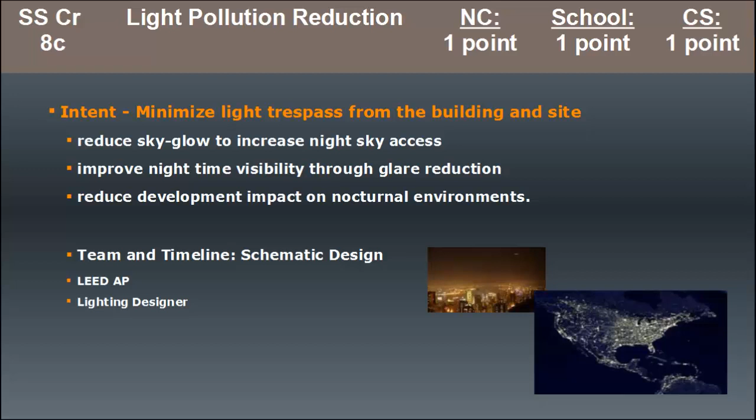Project teams must comply with one of two interior lighting requirements. Option 1 is reduce the input power by automatic device of all non-emergency interior luminaires with a direct line of sight to any openings in the envelope by at least 50% between 11 p.m. and 5 a.m. After hours override may be provided by a manual or occupant sensing device, provided the override lasts no more than 30 minutes.

LEED version 4 draft 4 proposes to remove the interior section of this credit since it is covered in the energy and atmosphere section.

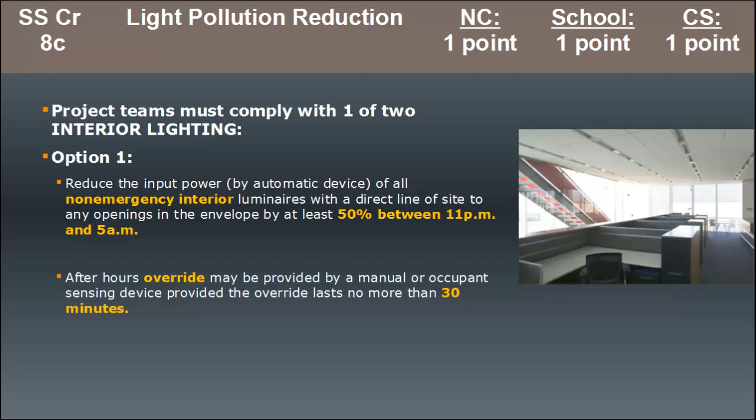Option 2, all openings in the envelope with a direct line of sight to any non-emergency luminaires must have shielding, controlled closed by automatic devices, and be resultant of transmittance of less than 10% between 11 p.m. and 5 a.m. This is for interior lighting.

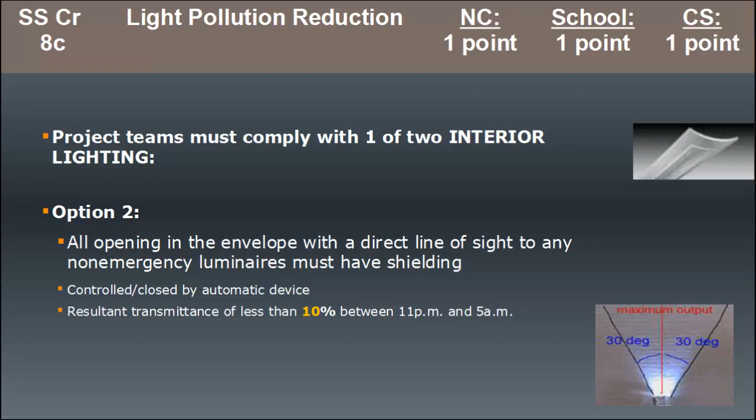For exterior lighting, the requirement is to not exceed ASHRAE IESNA standards of 90.1 2007 exterior lighting section. Must meet 80% of the lighting power density in watts per square foot for exterior areas and 50% of lighting power densities for building facades and landscape fixtures and features. So you must meet the standard for light trespass for zone requirements.

You see here there are some integrated lighting, solar powered, exterior lighting, glare control. Basically what you're looking for are full cutoff luminaires.

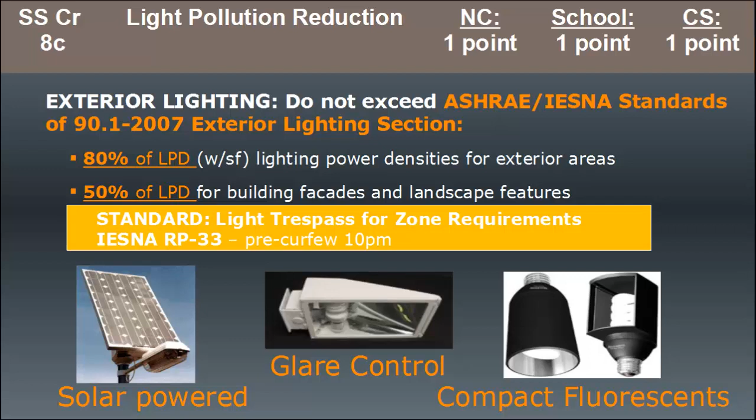The lighting zones currently include LZ1 dark, park and rural, LZ2 low residential areas, LZ3 medium commercial industrial high density residential areas, LZ4 high major city center entertainment districts. Associated with each one of those is illuminance values.

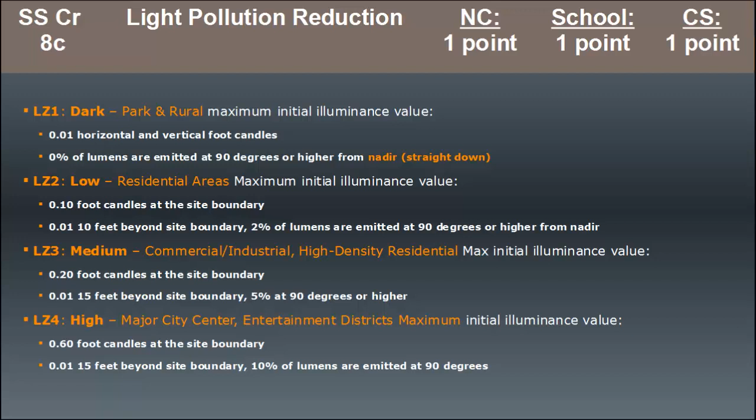For LZ1, this includes 0.01 horizontal and vertical foot candles. 0% of lumens are emitted at 90 degrees or higher from nadir, straight down. In comparison, LZ4 high, here's in the city center, the illuminance value is 0.6 foot candles at the site boundary, and 0.01, 15 feet beyond the site boundary. 10% of lumens are emitted at 90 degrees. And then LZ2 and LZ3 fall between that.

For all zones, light at the intersection of a private driveway and public roadway accessing the site is allowed to use the center line of public roadway as a site boundary for a length of 2 times the driveway width.

For schools, regarding sports fields, the sport field lighting is exempt from these ASHRAE standards. Automatic shut-off is required no later than 11 p.m. Manual override must be provided to avoid disruption of events.

For schools, trespass, there are calculations in 2 conditions. With the sports lighting turned off, the light trespass requirements are same as listed above, but with just the sport lighting turned on, the light trespass requirements for horizontal and vertical foot candles may be increased. This is only for schools.

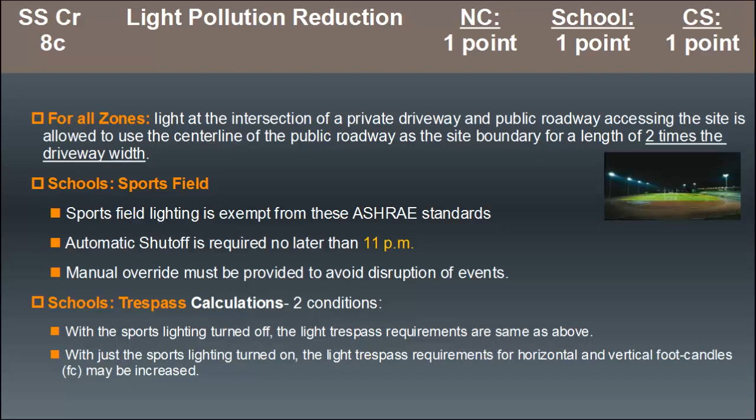For timeline and team, the lighting designer should determine the environmental zone. This may also be the architect. And after the exterior light is designed, there should be a photometric analysis as one option for meeting the compliance. In the construction phase, landscape architect, civil engineer, lighting designer, architect, and electrical engineer need to work together to supply the necessary information.

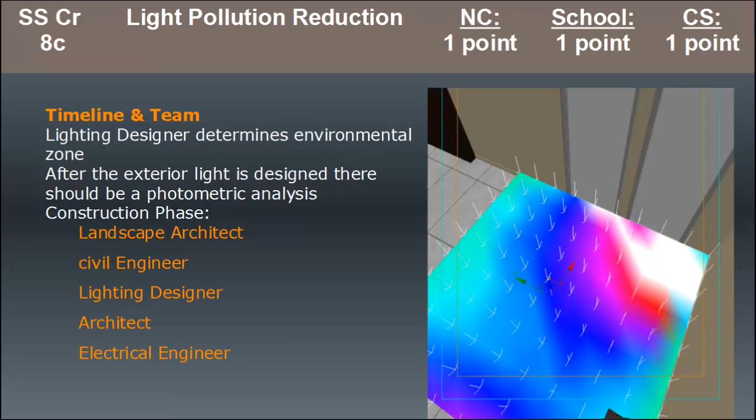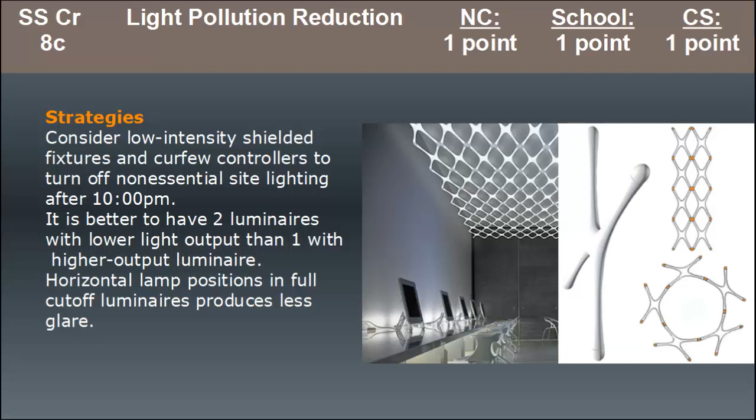The benefits of light pollution reduction include improving nocturnal ecosystems, preventing sky glow and light trespass, improving night sky visibility, and the initial cost and ongoing operation costs for exterior lighting being reduced through more efficient lighting that actually serves more of its purpose for safety and lighting the site.

Related credits include Energy and Atmosphere Credit 1, Optimizing Energy Performance, and Environmental Quality Credit 6.1, Controllability of Systems, Lighting.

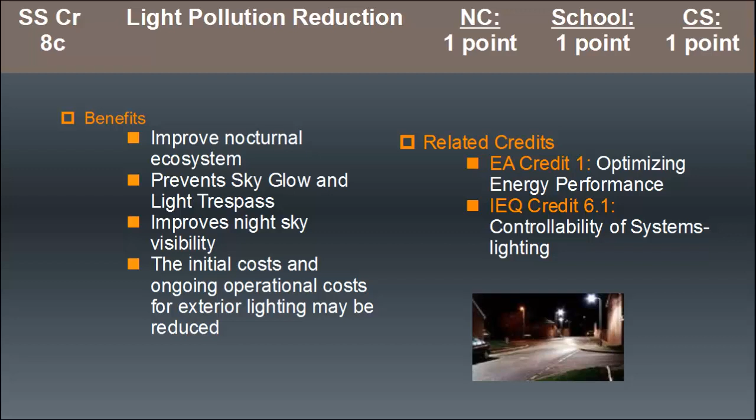Calculations for the exterior lighting power density. Wattages must be input watts, not just lamp watts.

For exterior sky glow, set up a horizontal calculation grid to measure site illumination at the ground plane. In LZ2, the grid should extend 10 feet beyond the site boundary.

In LZ3 and LZ4, extend 15 feet beyond the site boundary, and repeat this for vertical illumination. The calculation spacing should not exceed 10 feet by 10 feet and exclude building interior.

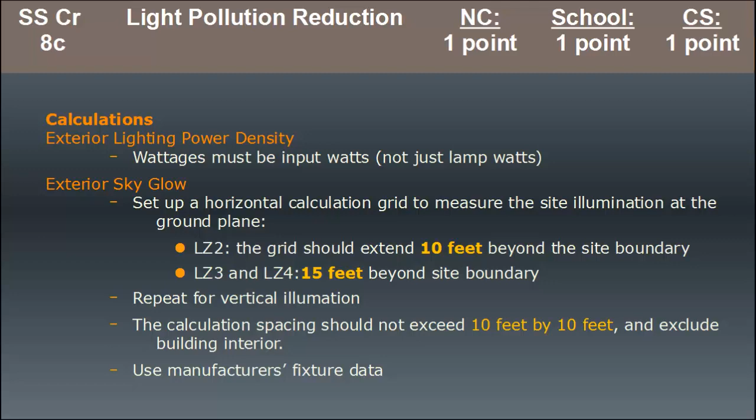Here's an example of the difference in a nighttime view of a full cutoff luminaire versus an exterior light that allows for a lot of spillage. There are both safety issues from glare while driving and inefficiency with energy here.

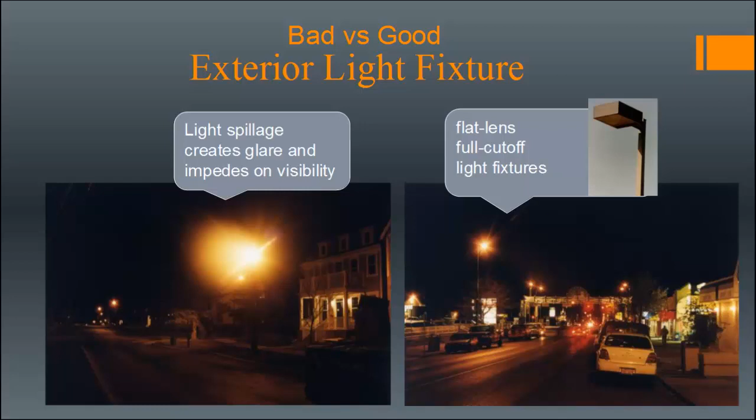Here's an example of a photometric site plan on a 10-foot grid, and how this credit really encourages incorporating exterior lighting into the overall aesthetic of your building.

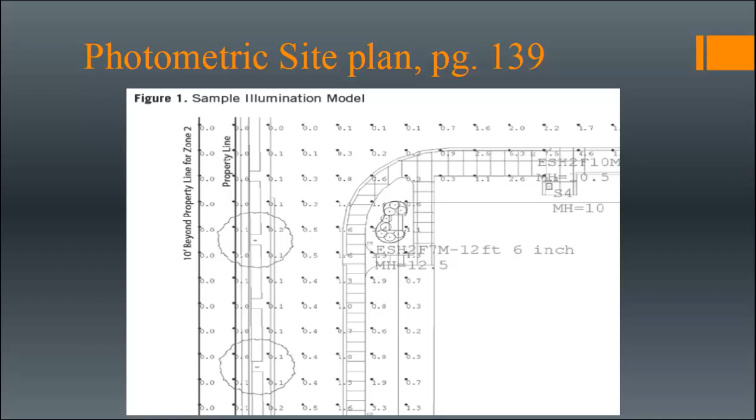Sustainable Sites Credit 9, Tenant Design and Construction Guidelines, only applies to core and shell projects. It requires publishing an illustrated document that provides tenants with design and construction information, including a description of sustainable design features, information on LEED for Commercial Interiors, how the core and shell building contributes, and information that enables tenants to tie into sustainable systems.

This really shows how the new construction rating system interacts with, for example, the LEED for Commercial Interiors rating system, and that those two go hand in hand—it's important to inform tenants on how to meet that intention. LEED version 4, draft 4, has added storage and collection of recyclables to the core and shell rating system.

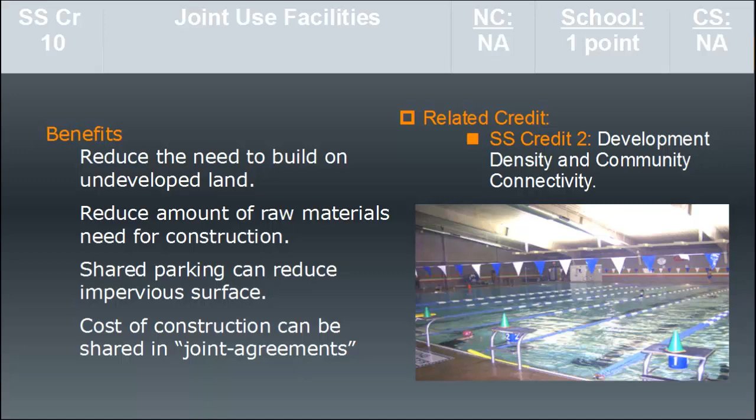This is for healthcare projects, and it's about connecting to the natural world, providing direct access for patients and places of respite. This could be a green roof or just open space, but it really starts to connect to our innate drive to be connected to the outdoors and nature.

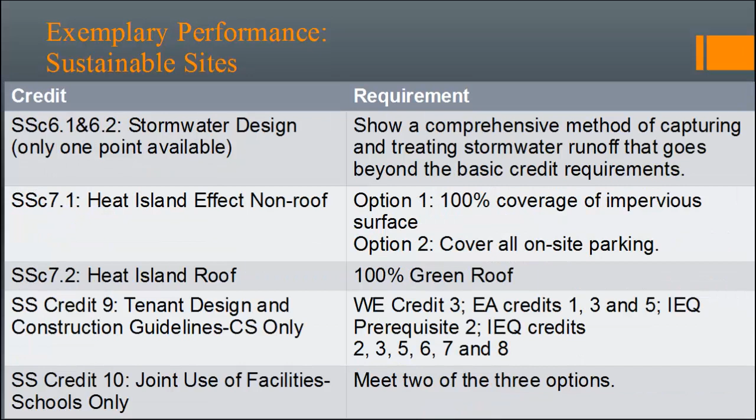This concludes Sustainable Sites LEED version 3, presented by Summer Gorder, EcoReal LLC.